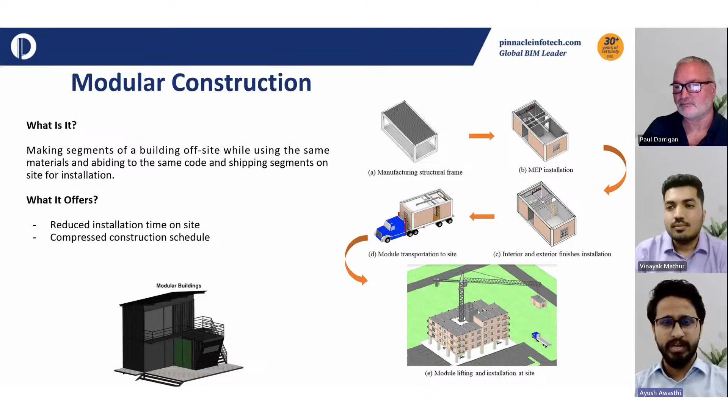As we understand, in today's scenario, modularization is in each and every field of construction. It is out there in residential, commercial, and industrial. It is playing a big game.

They printed out separate papers with their designs and layouts, and then they sold them to the public, and it became famous. It hit really good, and people started purchasing these modular homes. It was constructed in the fabrication shop, and then directly delivered and installed on the sites.

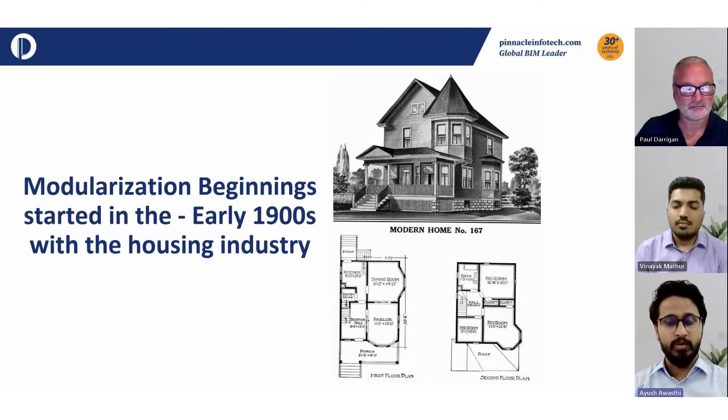But after the World War II era, it really took off. During World War II, a lot of residential areas were destroyed. So whole towns were built overnight using modularization, and since then it has become very popular in the construction industry.

Previously, it started from homes, from living apartments or condos. But now, in today's era, we have moved on to multiple segments. While we are not reserved to modularization in residential, we have gone to commercial, we have gone to industrial.

If we take an example, in today's industrial era, we have big, large bore pipes of 64 inches diameter, and we take the material out directly to the site, install it, and then cut it and weld it. That's going to take a lot of space in your construction site.

So to remove that space, to build out all those things, today's contractors are using modularization, they are using a fabrication shop, fabricating all these spools, and then transporting and installing them.

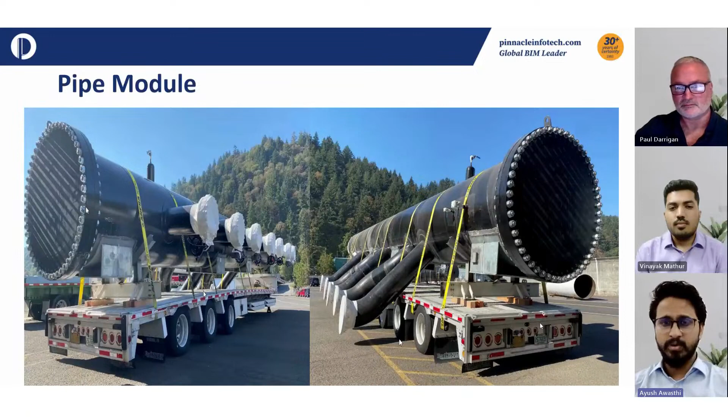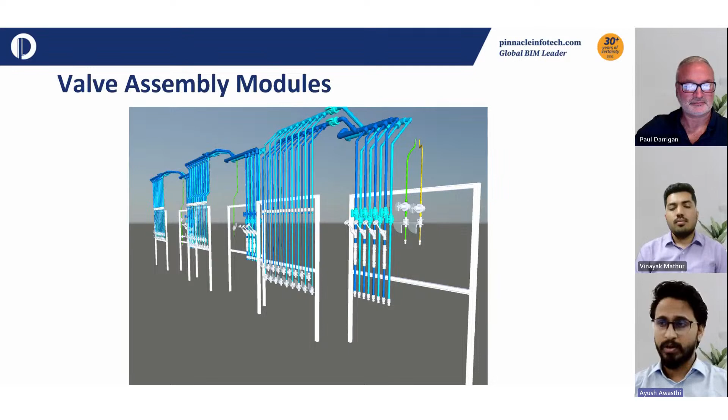As I was talking about, in industrial and commercial we have those valve assemblies, the gas unit, and your pipe, your oiling unit, and for the valve assembly, valve manifolds, they are using modularization only.

So this is just a typical example of how it's going to be, what kind of drawing they are using to construct. So Paul, what do you think?

You have worked in the construction industry, industrial construction industry, for a long time. So what do you think about this particular drawing? What kind of information and level of detailing is in it?

Well, you've got the controls that allow for quicker assembly, more precise assembly, and more efficiency. And you also don't have weather as a delaying factor.

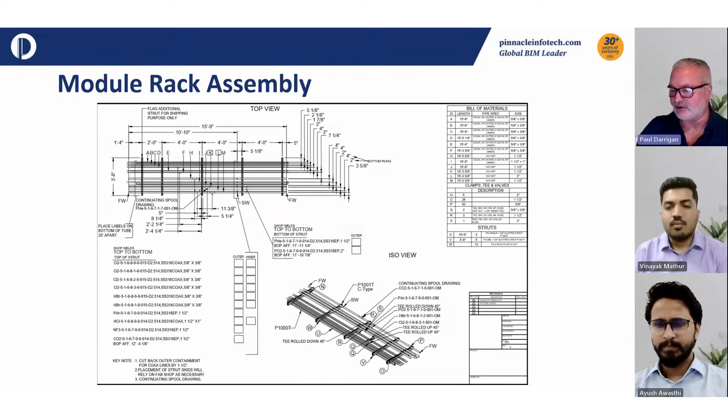So Vinayak, you've been working in the commercial segment a lot, and you've seen all those big stadiums and hospitals and multiple kinds of commercial and residential projects. So what do you think is the impact of modularization in those industries, and is it getting bigger, or is it reserved to piping, HVAC, and the steel on the main runs on the corridors, or is it getting to each and every space in the building?

Well Ayush, this varies across different industries. But for example, the National Health Service in the UK is one big example, they've set up hospital chains across the entire country. So if you look at how modularization comes into play, let's say I have to build a hospital with a set deadline to implement this project and have it ready for the masses in a short span of years.

So with a short deadline, I see that the hospital as a building would have identical spaces in terms of structure, architecture, and purpose, meaning the med gas piping runs, and if we talk about particular operation rooms, there's a slight sense of identicality here. So this is where I can break this down into small modules.

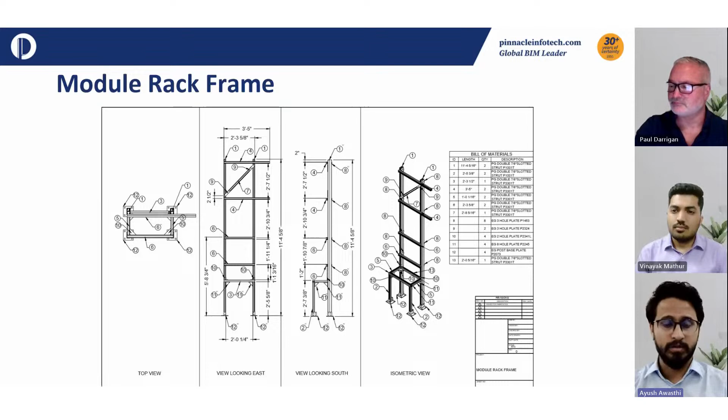So all those things, in today's day, they are modularized. People are getting modularized clean rooms, and they are fabricating it in the fabrication shop, like clean rooms getting compartmentalized into a module. So that is today's technological advancement in this.

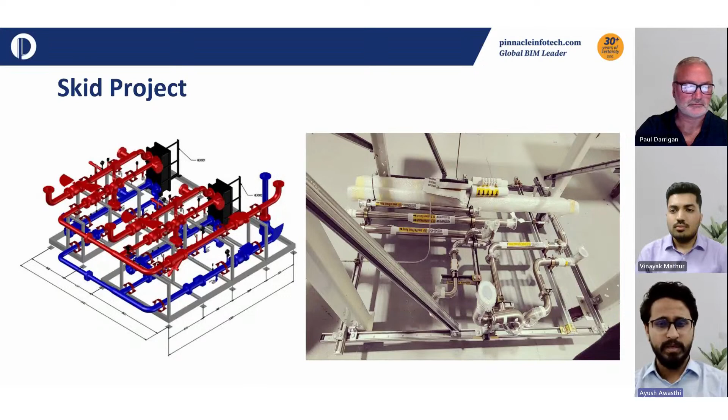So this is just a typical example of the skid project, a small unit of modules compiled with multiple and bigger ones to take a big shape. If I remember correctly, this particular one in red and blue was part of a dairy plant. They had multiple of these modules placed on the whole floor, getting connected to the vents, connected to the inputs, with minimum piping just to connect these modules in between. So everything was built in the shop, went on site, erected, and the time saving and cost saving in that was huge.

So as we talk about the technological development in modularization, we have come across, from pinpointing or hand sketching a spool, hand sketching a drawing, or creating engineering drawings with dimensions and everything, to the BIM era, where we have collaborative softwares, the approach, and the technology to develop the model without any clashes. We have the technology to detail the model with the requirement of fabrication, with the requirement of on site work, purchasing, procurement, and all those constraints we felt in the past. So all these collaborative softwares are now available for the industry.

So the BIM integration, what do you think, Vinayak and Paul? Has BIM integration made the construction industry reach the height that we are at today? It's a huge impact. Go ahead, Vinayak.

I wanted to add to this, Ayush. If we go back to history a little, modularization started post World War, and there was high demand for housing, which had to be met through creating tiny modules, assembling them, and placing them on site. Later on, this obstacle came into the picture, that designs were limited, and due to this limitation, the demand for modularization had begun to go down a little.

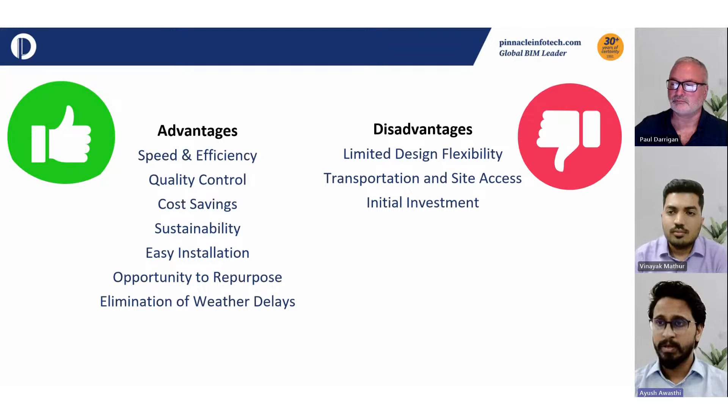But while we are talking about the modularization advantages and disadvantages, there is an impact from the traditional ways to the modular ways. I'd like Paul or Vinayak, anyone of you, to take the lead on this—what do you think the impact has been, from a particular time? Is it in a good way, is it in a bad way?

Yeah, schedules immediately improve—a lot of people don't take that into consideration. From planning and design, looking at modularization, that can take a little less time because we're thinking more of a modular approach instead of how do we lay this all out. Foundation, you're looking at about the same time. Offsite manufacturing, you can cut schedules almost in half, 20 to 50% less on a schedule, especially when you're in a time crunch, because you've got offsite fabrication and a quicker installation.

Which as we expressed is 3 to 6 months, and then the rework and overrun in schedule has been reduced from 4 months to next to nothing. So I agree 100% with that, Ayush. The impact is there. Vinayak, what do you think?

I think with the time aspect, definitely we're cutting down on labor costs. We are also cutting down on material wastage. That's not only the modularization aspect in play here, but that's pretty much the whole driving concept of BIM here and clash coordination through Navis. So definitely, the fabricators and fab shops are also realizing how BIM, when integrated with the concept of modularization, is impacting construction and construction schedules.

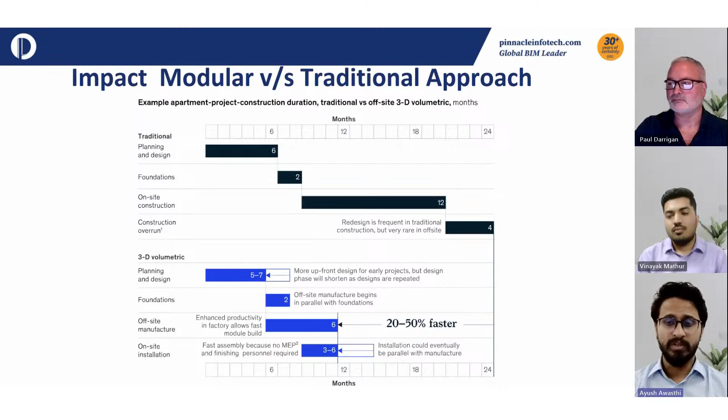And that is part of your smarter project management system as well, to decide the time schedule, the dashboard, and coordination with multiple stakeholders. So the impact is there, and the time constraint we mentioned previously, where for an average project site it would take 2 years or 24 months to develop, they've compressed to 12 months. That's a huge approach, with digitalization, BIM, and modularization.

So along with that, sorry, that was messy. So the challenges that come with modularization - there are multiple challenges we have seen.

While we were talking about industry disadvantages, there was the initial cost - that's the industry adoption part. And like you mentioned in the previous era, in the 1900s, it didn't get much popular because of not so flexible designs and labor shortage. So currently in today's world we're also seeing skills and workforce training challenges - is that correct? And then we have regulatory and permit frameworks, which is also a challenge we're facing today. So what do you think about all these challenges that come with modularization?

Yeah, I think - yeah, please go on, Paul.

Okay, so industry skills and workforce training - these two aspects are kind of working together here, posing as one big challenge together. If you look at things from a fab shop manager's perspective, there's the case that I have a certain workforce with me. I have to assess what their skill sets are, what they're familiar with regarding the softwares that are churning out these modules now - softwares like Revit and Fabrication CAD. These softwares are preparing these modules, so I'll have to first ensure my workforce is trained on them. They need to understand what's driving these softwares.